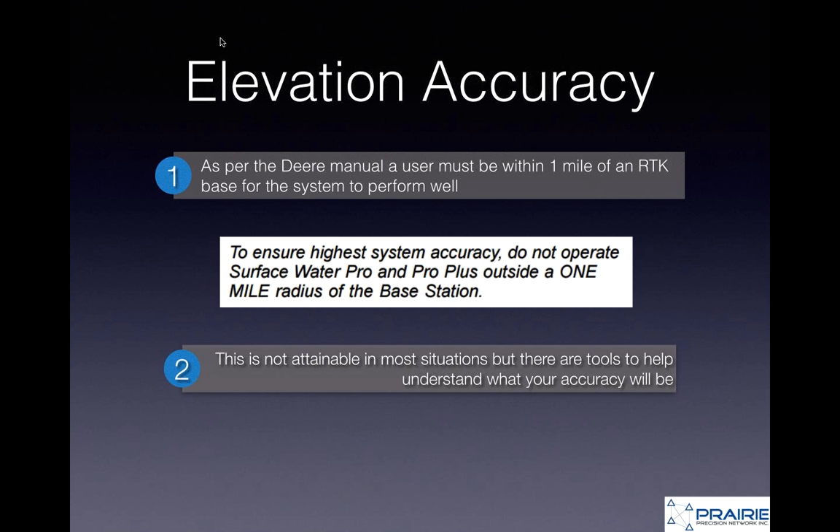I'm not going to load these 2 tools, but these are very good things that you can use. So satpredictor2.deere.com you can use, and it will show you for your area. You can search an area, and it will give you the accuracy level of a given day. It's very important to be using these tools. Traditionally, with SF1 AutoTrac or WAAS AutoTrac or anything like that, we just turn it on and go. It's a little bit different when we're talking higher level accuracy, and especially when we're talking water management. You do need to reference these tools.

And as well, the space weather forecast really affects GPS signal in general. Again, you don't see it as much with SF1. You definitely see it with RTK, what the space weather is doing. So those two tools, make sure you write those down and use them. The one thing that we have found is in your StarFire menu, if you're a John Deere customer, you can see the VDOP.

So if you were to go to StarFire and then letter G on the right-hand side where the little satellites are, you can see your current VDOP number. And that we find should be below 2.0. It just should be below 2 to run John Deere water management applications.

So we did do a couple tests this summer as well. This was on a scraper, and the scraper did not move over these 3-4 days. We took a measurement on August 7th, and you can see the elevation there, and then August 10th as well. So our elevation is 1646.274 on August 7th. Nothing was moved. The tractor was turned on and we just took a snapshot of the screen. We can see that it moves 7/100ths of a foot over 3 days.

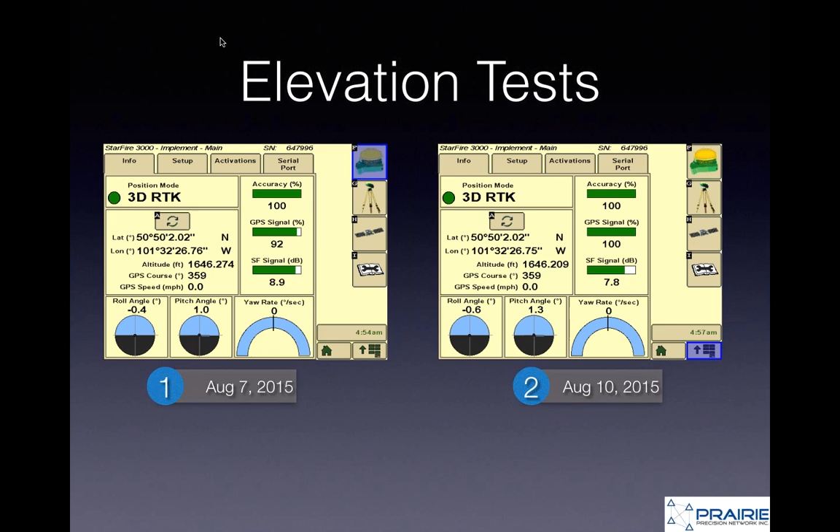So again, as long as you're within coverage, we have quite a few customers using our virtual reference station to do surface drainage and water management of all sorts with our products. So they do work well.

So I guess what we're saying is it's a very proficient way of providing RTK across the most number of acres. Like we talked about with the VRS network, we do not have line of sight issues. Our signal does not degrade. However, we are not recommending our network solution for tiling or land leveling applications at this time. And just on note of that, we are working towards some new products that would assist in these applications and still be able to leverage our network RTK.

So we have customers currently using it for surface drainage, and that's what we're going to focus on today. And that's what we can recommend, again, within coverage and providing you that network solution. So survey optimization: we're going to move into what is a good survey, and Mike Evers is going to talk about that for a few minutes here.

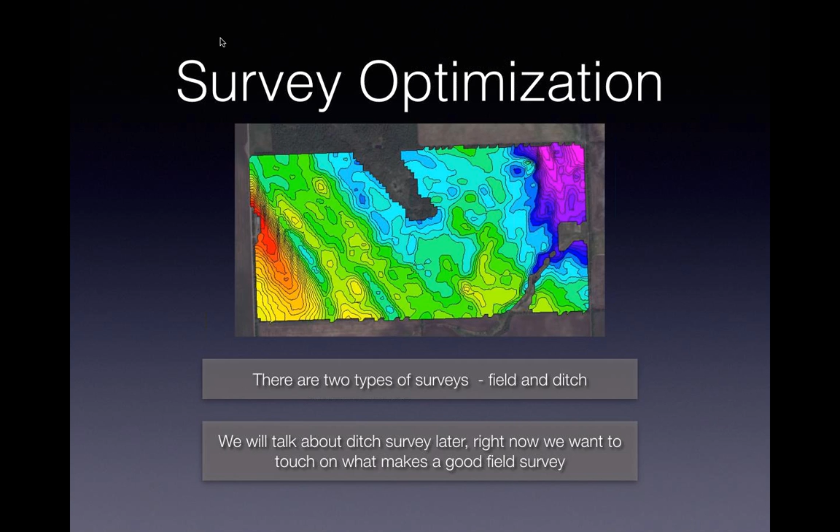What we want to talk about is first, there are 2 types of surveys. We have what we call a field survey, where we're going to cover the entire field, and then we have a ditch survey, where we're just going to survey a portion of the field that we know is a ditch that we want to work in. We're going to focus on the field survey. We'll talk about the ditch survey a little later. So here are some of the things that we want you to keep in mind when you're doing these surveys.

The first thing is the hardware. What hardware are you using to record your data? Obviously we expect you to be using the StarFire receiver with a PPN RTK, but more importantly, how are you recording this data? Are you recording it with the 2600 screen, or there are other options where you can use third-party data collector software. As an example, there's software such as SMS software, and there are a lot of others that you could run on a laptop PC and connect to the NMEA port on the StarFire receiver. The reason you may want to connect to those other types of devices is they record a little bit more information than the John Deere recording.

For example, as Jason mentioned, you want to worry about where your VDOP is. We want to make sure it's below 2.0 when you're doing your vertical surveys. When the John Deere is recording, it's recording all positions, and rightfully so. They want to simplify things as much as possible. But as a surveyor, you want to know if my VDOP is higher than a certain value, so that I'm going to start to question that position.

So the advantage of going to a third-party recording is you might be able to use that to edit out the positions where the VDOP might have gone up too high. Because with those high VDOP positions, your vertical precision is not as accurate, and it may be tainting your survey data. So you want the ability to edit that out to have a cleaner set of data that you're working with.

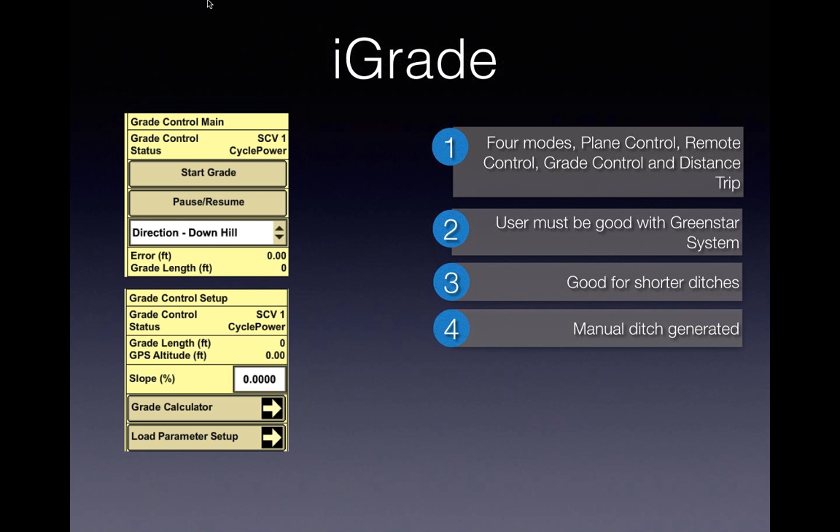What we mean by that is this is going to create a linear ditch, and it will not be able to respond if you have depressions in that ditch that you're creating. So we'll talk more about this in the iGrade optimization portion, but in general, this is a really good product if you've got shorter ditches.

Surface Water Pro Plus. So there's three modes to this: the survey, the ditch, and the levee. Obviously, we're going to focus on the ditch in our area, minus Rosetown that needs levees, I guess. Users do not have to be good with the Greenstar system because it functions very similar to AutoTrac. So if you have a hired hand on your farm that knows how to create an A-B line and knows how to use the AutoTrac system, he will find this very comfortable and very similar with a little bit of training.

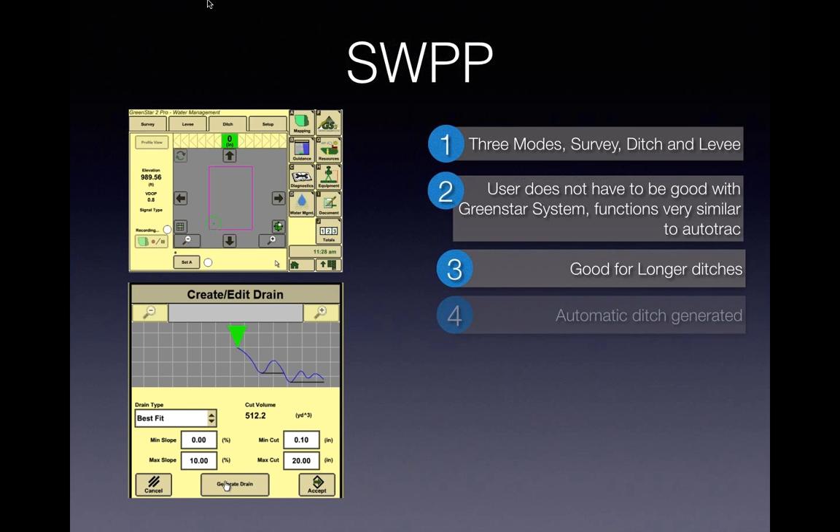We have found in the past that this is good for longer ditches because the computer will recognize those depressions in its survey, and it creates an automatic ditch. So you can see in the bottom image, we have surveyed there with the blue line, and the black line is what we're going to cut. So the computer is automatically creating that ditch and using those natural drops in that survey where iGrade would not do that.

So in general, the easiest way to compare these two products and to explain these two products is iGrade is good for shorter ditches. Surface Water Pro Plus is better for longer ditches. Not to say either one can't do it. It's a very broad generalization and kind of simplifies it, maybe too much, but that's what we found worked explaining it in the past.

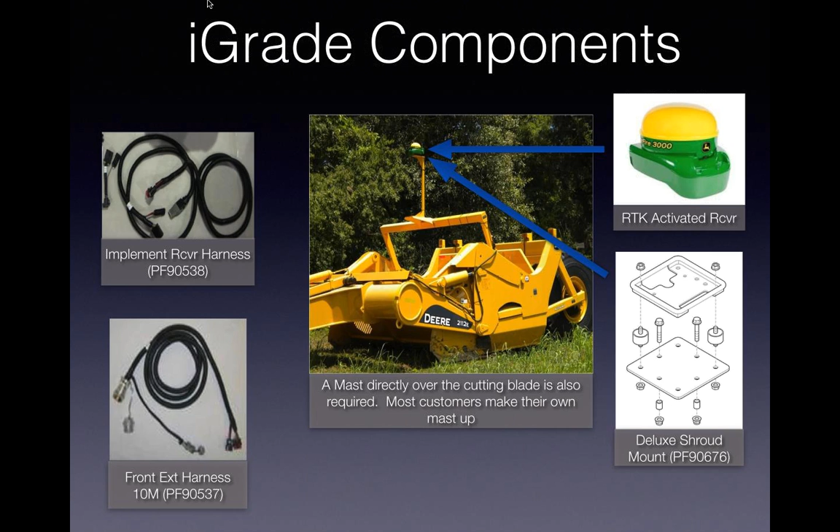As far as the iGrade components, we wanted to just compare the iGrade components to Surface Water Pro Plus because this is sometimes a little confusing. So we do have a lot of dealers on the line here. So I have added the John Deere part numbers for you to reference afterwards. So what we do need is a GS2 or a GS3 screen. We have a couple harnesses there that we need on the tractor.

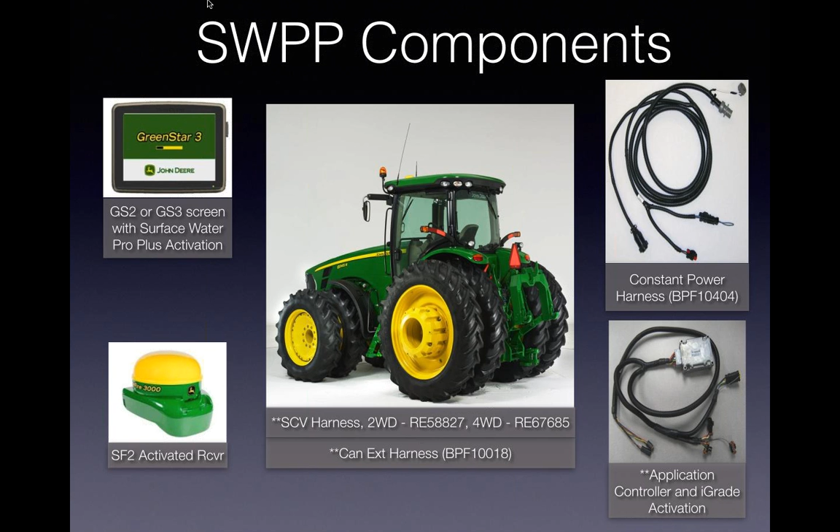An SCV harness for two-wheel drive or four-wheel drive, a CAN extension harness. You need your constant power harness going to the back of your tractor, and then your application controller with an iGrade activation. That takes care of all the tractor components. On the scraper, from that constant power harness at the back of the tractor, we have in the bottom left our front extension harness, and that's the 10-meter version. That runs all the way up and back into our scraper.

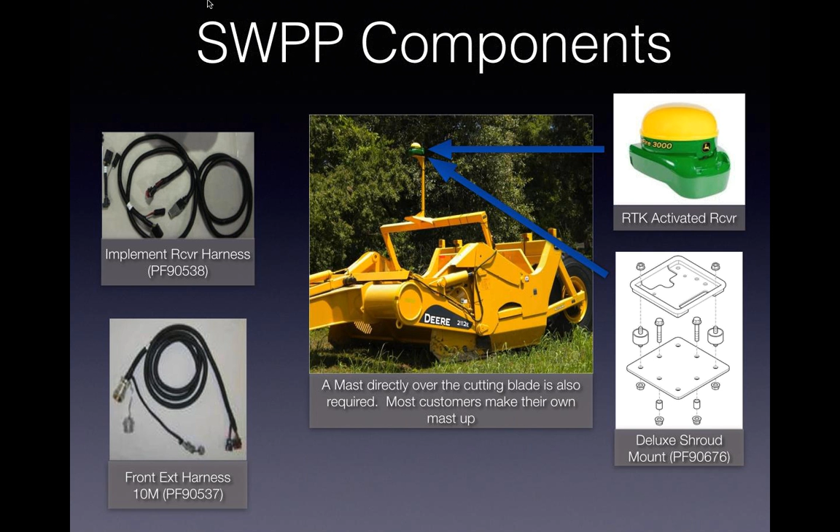Then we have our implement receiver harness in the top left. As well, we have our RTK activated receiver, and it has to be RTK to work with iGrade. And we also have a mast that is directly above the cutting blade. There are some available from John Deere, but every scraper is a little different, so generally speaking, customers make up their own. And then you need a deluxe shroud mount. So you can get all those parts individually, or you can order that one part number and it gives you that entire kit. That's a little bit cheaper to put a deluxe shroud mount on your mast.

Moving to Surface Water Pro Plus components, if you remember the components of iGrade, it's all the same except we're adding two things. We're only adding two things. We're adding the Surface Water Pro Plus activation, and we're adding the SF2 activated receiver.

Hey, Angelo has a good question. Which tractor series are working on iGrade? Anything with electronic SCVs, so 9000 series and newer that have the newer SCVs will work with iGrade. So 9000 and newer all the way up to the 9Rs. Good question.

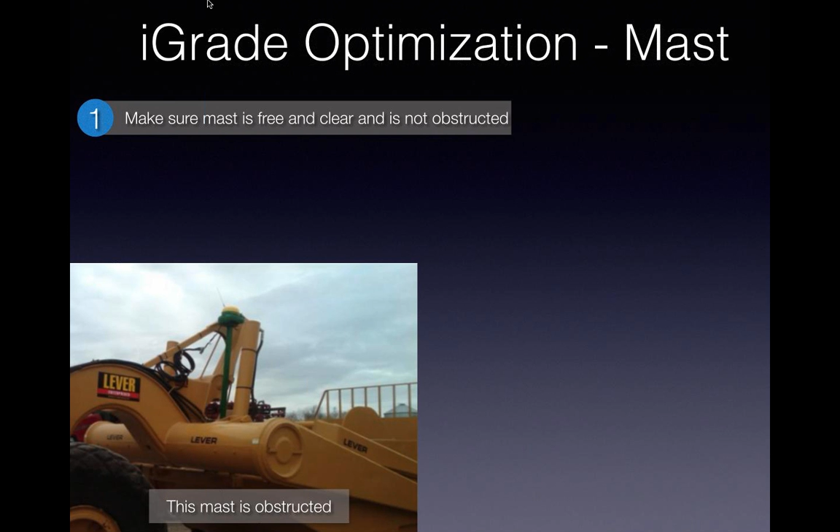The first one, this seems like a simple thing, but it happens: you need to make sure your mast is free and clear and not obstructed. So in this example here this mast is obstructed and causes lots of grief, and this would be the same for any RTK system. That metal there would be interfering with the GPS signal as well as the radio connection or the modem connection that we use with network RTK. So make sure that your mast is free and clear.

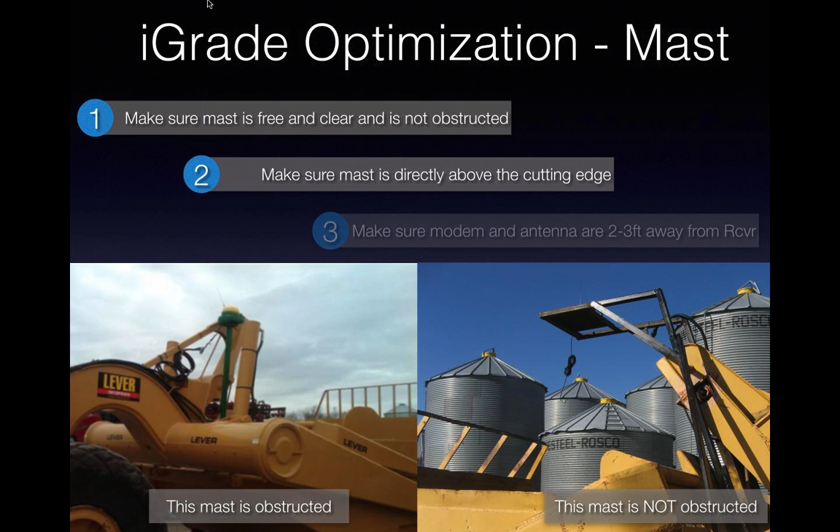And make sure your antenna and your modem are 2 to 3 feet away from the receiver. That just is for signal interference issues that we have seen in the past. And so the best practice is, make a mount like you see here on the right-hand side. Mount your receiver in the middle, let's say, but then put your modem on one side of that iron there, and your antenna on the other.

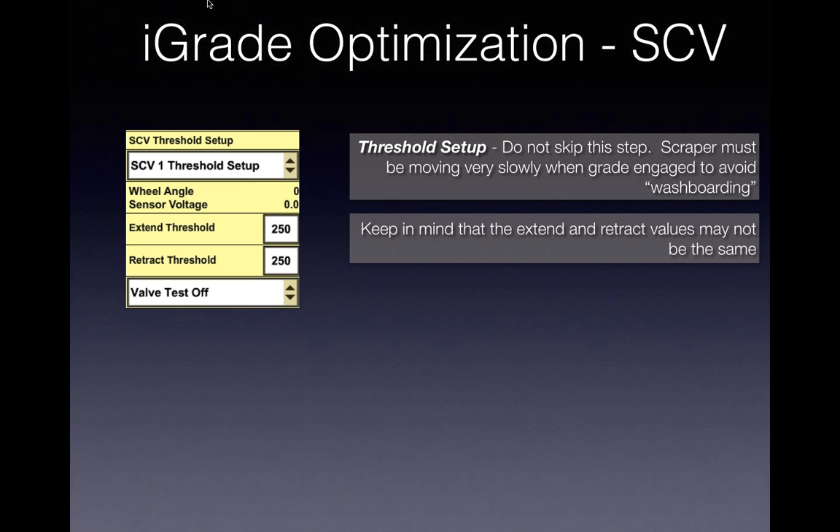So one of the things that are very important with iGrade setup is the threshold setup. So this is in the screen and in setup, and the scraper must be moving very slowly. So when we engage this, we want our scraper moving very slowly when going up and down. So what we do here is we guess a number and we hit that valve test box, and then we move it to extend or retract. We detent the SCV that we are using, and it will kick iGrade in. And you'll be able to see how fast or how slow that is operating.

You want your retract threshold slow, which is going down, your extend a little bit quicker coming up, and that is to prevent washboarding. So 2 things to consider if you're a dealer on the webinar here is DTAC case 91500, the installation of a counterbalance valve, and the iGrade calibration as well is a really good case, 102673. So have a look at those 2 if you're a dealer, to be able to just learn a little bit more about that.

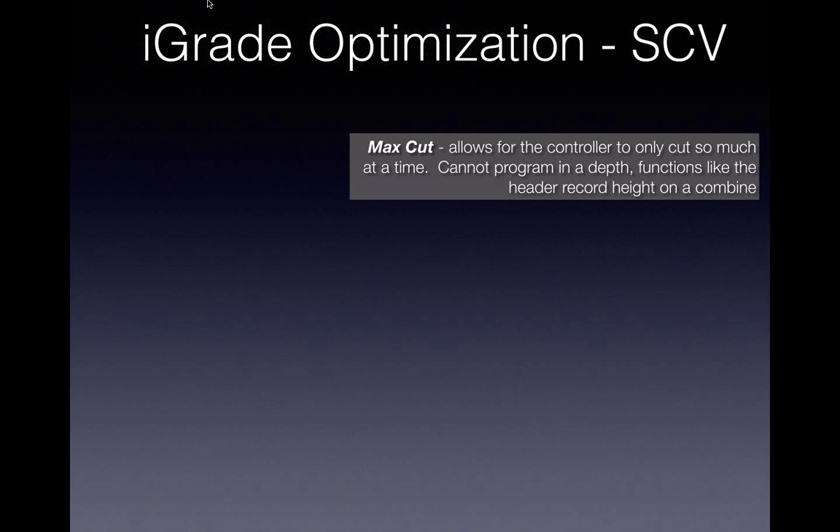And a couple features we wanted to talk about in iGrade as far as the setup is max cut. It is there to allow the controller to cut only so much at a time. You cannot program in a depth. It functions very similar to your record height on a combine. So if you have a John Deere combine and you know about the record height and when your recording starts, that's very similar. So for this to work, you need 2 RTK receivers.

Ourselves, we did a bit of testing with this, and we just found the feature for having that extra RTK receiver wasn't as good a feature as we had hoped for. So generally speaking, we don't use it, but it is available if you do want to put another RTK receiver on your tractor.

Load limiting. This allows for a stepped response from the controller. So you can tell it at a certain RPM, start lifting, and it will start lifting the scraper. So as you bog down in a certain cut, it will start to lift the scraper. You cannot use it with Surface Water Pro Plus. And the recommendation as far as leaving it off is it's a computer, and we can't program a range into it for today. So we can only give it 1 RPM.

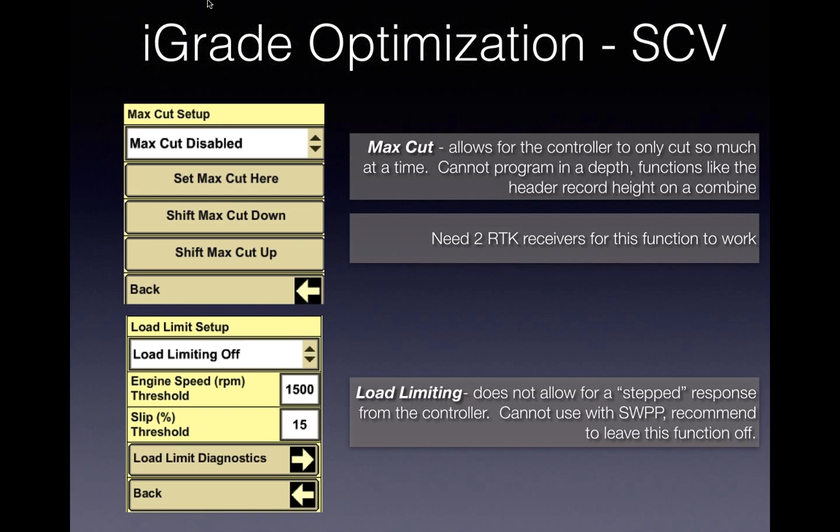So if you're cutting at, say, 1750 RPM, 1800 RPM, and you tell it, well, at 1650 RPM, I want it to lift, we cannot tell it at 1700 RPM, lift this percentage, at 1650, lift this, at 1500, lift this. It is 1 or nothing. And so what we have found in our testing is it being a little bit too slow to respond. As the scraper starts to bog down, it's too slow to respond.

So maybe we're wrong on that, but definitely it's a feature you can fool with and try. Just be aware that it is a black and white thing, it's a computer. So we recommend to leave it off. And as well with Surface Water Pro Plus, you have to have it off.

Now, just going into the modes, so that was the setup of iGrade, and into the modes, the one mode that is very useful is plane control, and it allows the operator to create a flat surface with 1 or 2 slopes. So this is very simple to use. It's very good for creating a bin site or leveling an area for a shop, and that's the one image there from the screens, and this is the other one.

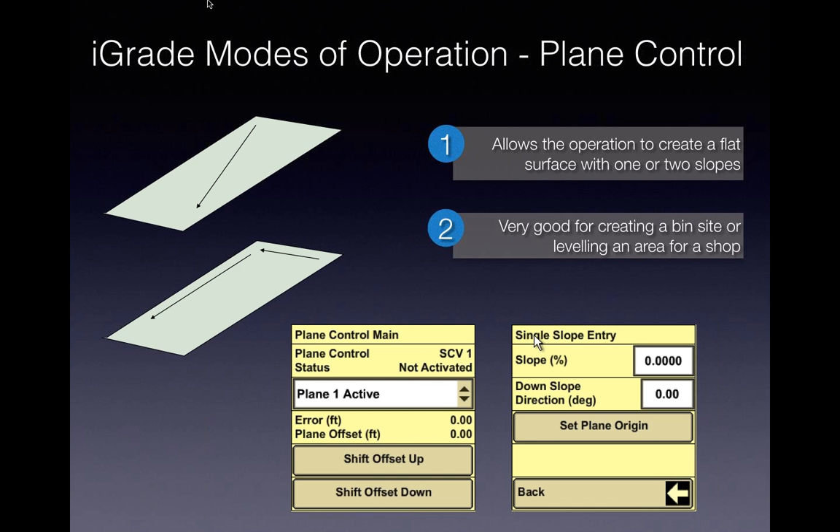So you just basically on the right-hand side, lower your blade down to where you want the plane to be. You hit set plane origin, detent your SCV. In this case, it's SCV number 1, and you drive. It's very simple, and there's not much more to say to that. You can program a slope, and you can program dual planes as well, which we're not going to get into today, but just letting you know that it's there.

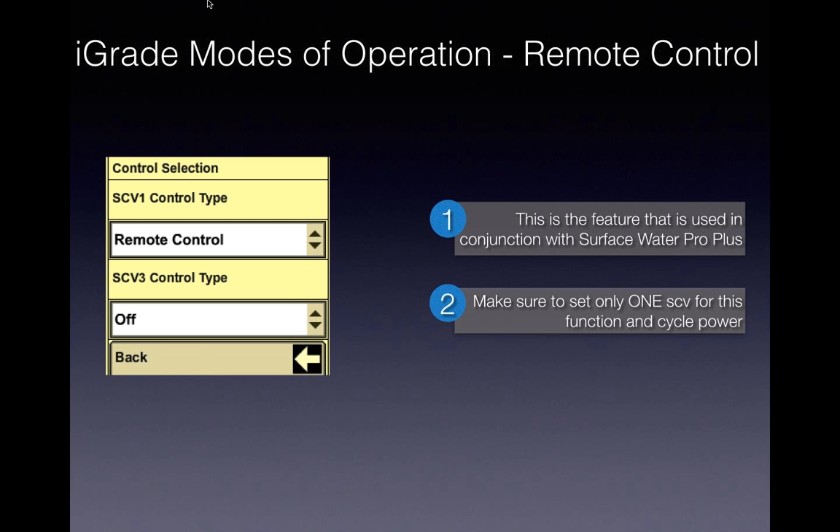Remote control. So this is the feature that's used in conjunction with Surface Water Pro Plus. So if you wanted, again, that full meal deal package of the controller controlling the hydraulics and then Surface Water Pro Plus, you're going to set your control selection to remote control. So again, this is in application controller and then setup, and you're going to go to remote control and then be done. So that's pretty simple. So again, you can only set 1 SCV for this, and then you cycle power once you make any changes, and you're good to go.

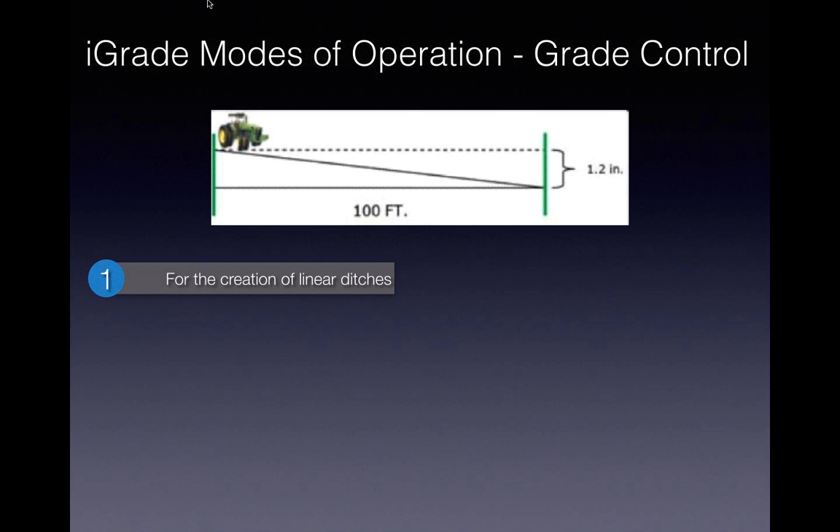The function that most people use with iGrade is grade control. So this creates linear ditches. So a straightforward line, like you can see there in the image, we just go ahead and lower our blade to where we want to be and start. So you input the grade, and then it continually calculates from where it is set from. I really used bad English there.

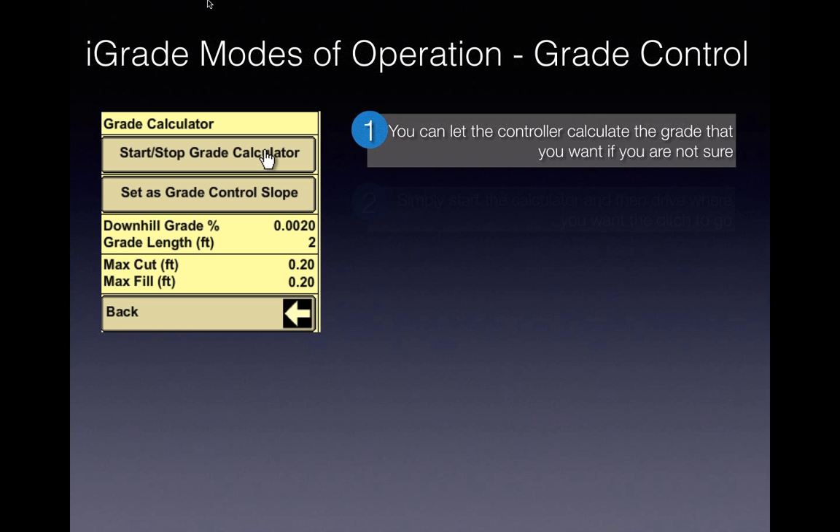One of the things you can do, though, is you can use the grade calculator. There is a grade calculator in grade control. It's very simple to use. You go to your application controller, you hit start grade calculator, and it will record wherever you go the grade length and the grade percentage. It's really simple to use. Once we have that, we would take that calculated value, so this downhill grade here, 0.002%, and we would put that into the grade control slope box.

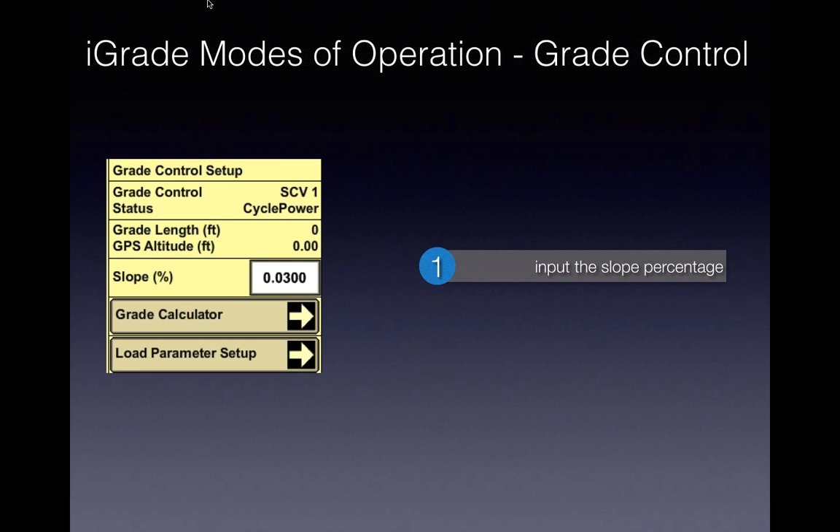So this is our run page. Sorry, not our run page, but one of our setup pages for our grade control. So all we do here is we have to tell it what percent slope we want. Generally speaking, 0.03 works well for a slope to get the water moving. And that's all you do. Input that slope percentage there.

And then on our main run page, it doesn't tell us our slope percentage. We can set their pages up differently. And then the user, you have to tell it which direction you're going. So if you remember back to when we were talking the difference between iGrade and Surface Water Pro Plus, and I said you have to push a lot of buttons, I hope you're starting to see that there are a lot of buttons to push here.

So you have to tell it the grade, you have to tell it the direction, and then you lower your blade wherever you want to start, okay? Because this is different than what Surface Water Pro Plus is going to be. You set your blade to where you want to start, and you hit start grade. And it will create that point, in this case, in this example, that 0.03 grade from wherever we drive.

Making sure you're pointing in the right direction. Yeah, and you're pointing in the right direction. You're ready to go. You're at the start of your ditch. You hit start grade, you detent SCV1, and it will start cutting that 0.03% grade. Okay?

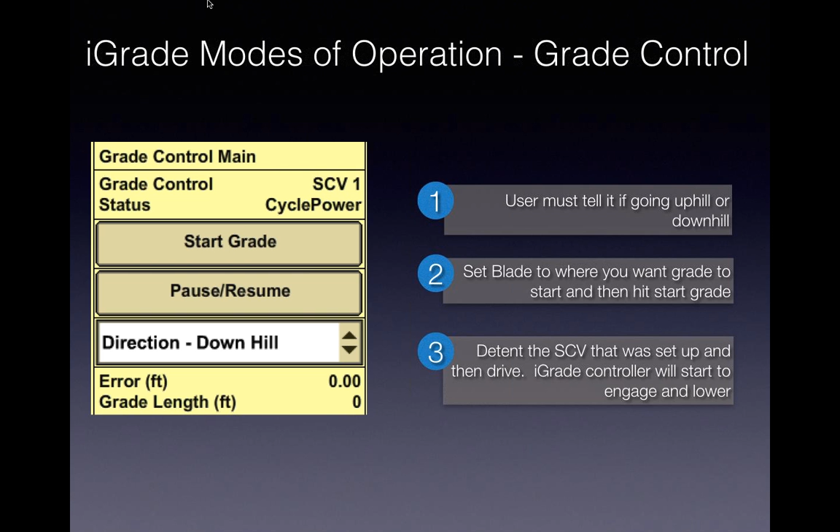So we can pause here for some questions, but again, just reference that iGrade handout if you can. And that is just kind of a quick reference guide because there's a lot of things that we just talked about. Just click on that guide there, Mike, just so we can see it ourselves. And it gives you a little bit of an indicator of how to go about, scroll down, setting it up and going about it. So I think we kind of went through that pretty quick, but that guide will help you as well. If you could zoom out a bit, I just want to see if I had the screenshots there.

Yeah, one of the questions we have here is why would a person not just buy Surface Water Pro Plus instead, like skip over iGrade? Good question. What we saw in the past is that if you buy iGrade, there's no cost or disadvantage or advantage to be upgrading to the Surface Water Pro Plus later. So currently with John Deere's pricing, there's no discount to buy Surface Water Pro Plus to start with. So what we had happen is a lot of customers buy iGrade, and then of course you have to buy the Surface Water Pro Plus activation and add an SF2 receiver. So for some guys that just had the one RTK receiver, iGrade worked, and that's all they needed.

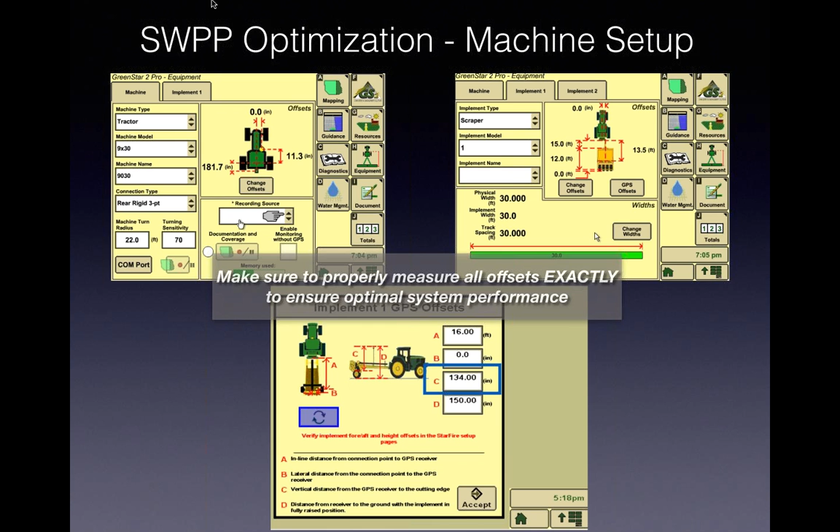So in this example, we have 16 inches of travel. The system needs to know that to operate properly. If you skip this step, or if you do this kind of quick, you're going to have problems. At the end of the Surface Water Pro optimization, we are going to talk about how to calibrate this. Because that first mast, if you remember, it moved up and back, and it travels on an arc. So we do need to calibrate this measurement. So make sure to measure all offsets exactly to ensure optimal system performance.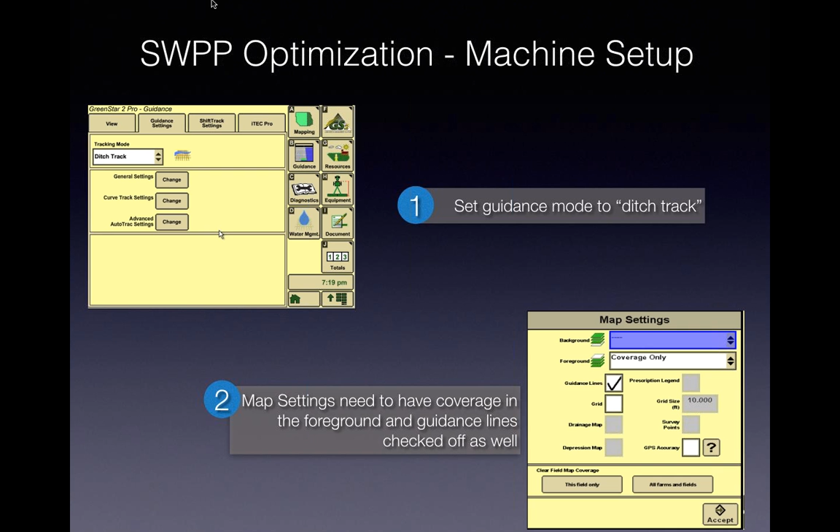So what we're going to do is, first thing, we need to go to our tracking mode, and we need to change our tracking mode to ditch track. If you skip this, you won't be able to make a ditch in water management. So we are in Green Star, letter B for guidance, and we've changed our mode to ditch track. Map settings need to have coverage in the foreground and guidance lines checked off as well. So that's under letter A. Go to your letter A, go to map settings, and then check off guidance lines and coverage. It should be defaulted, but just double check that.

And then we have to set up our documentation. We do need documentation on for this to work. So in your boxes there under letter I in the Green Star menu, we're going to hit water management, and then the type we're going to choose is ditch.

So in Surface Water Pro Plus setup, change the survey mode to distance based. It defaults to time. What we have found and what we recommend is distance based works best, and we want to change that to 7 feet. As well, your survey receiver source will default to the machine. So again, if you remember from our requirements, we now have a bubble on our tractor so we can auto track the ditch, and that needs to be changed to implement 1.

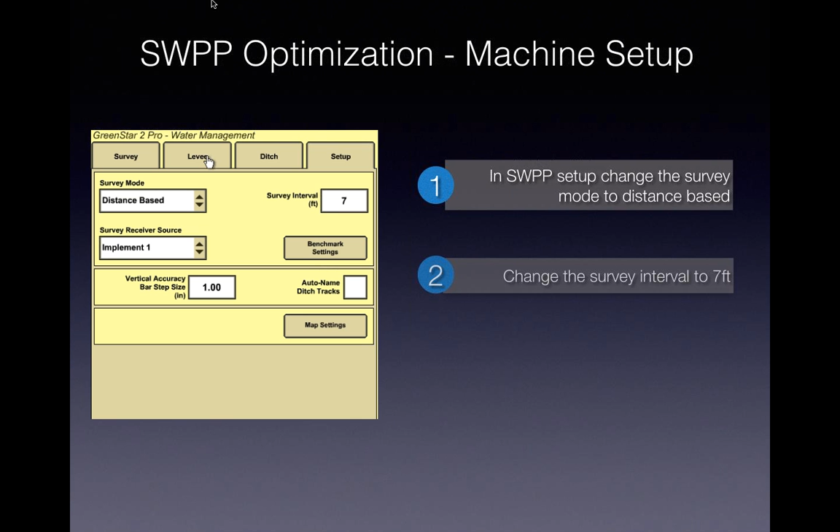Okay. Now, you can do a survey within Surface Water Pro Plus as you're driving. So again, back to what Mike was talking about, the survey. We do have customers doing this on machines, and it is working. And you can do this as you go through the field. Just keep in mind those things that Mike talked about that affect the accuracy of that survey as you go about doing that. So again, make sure that the survey receiver source is set to the scraper receiver.

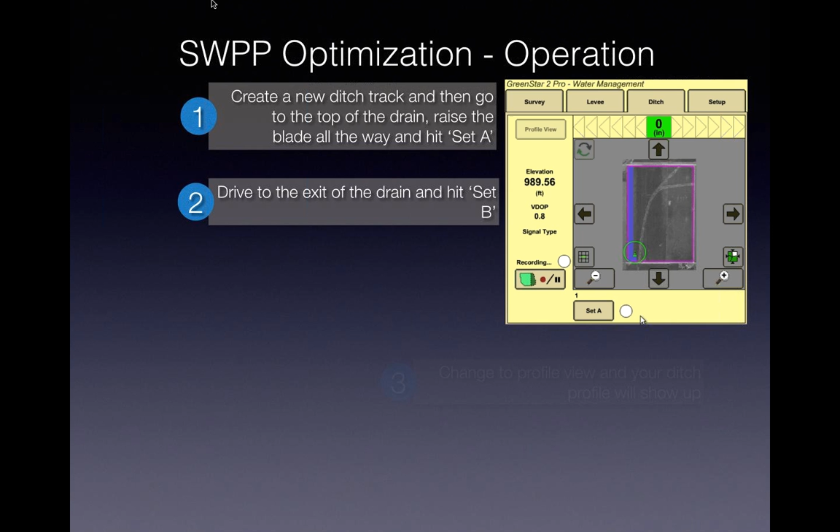So as far as operating this, once we're ready to go, we hit the ditch tab at the top of our water management page, and we raise our blade all the way. So if you remember in iGrade, we were lowering it to where we wanted to start and then hit set start grade. This is different. We're going to raise our blade all the way and hit set A. We're going to drive to the exit of the drain and hit set B. So remember how I said that this function is very similar to AutoTrack. If you've used any John Deere AutoTrack products, you are very familiar with what we're talking about here.

Once we do that, we change to the profile view, and then our ditch profile will show up. So if you see in the top left corner, there's a little box that says profile view. We change to that, and then we get this image. Once we have this image, we can create our drain. So what we're looking at here is a grid and an example of a survey. The blue line is what we have surveyed, and the bottom of the green triangle is where our current blade is right now, what the computer is seeing as far as where the blade is.

So what I want to do now is hit create edit drain. So just to recap, I've hit set A, I've hit set B, I've hit profile view. Okay, now that create edit drain box shows up, and I can choose that.

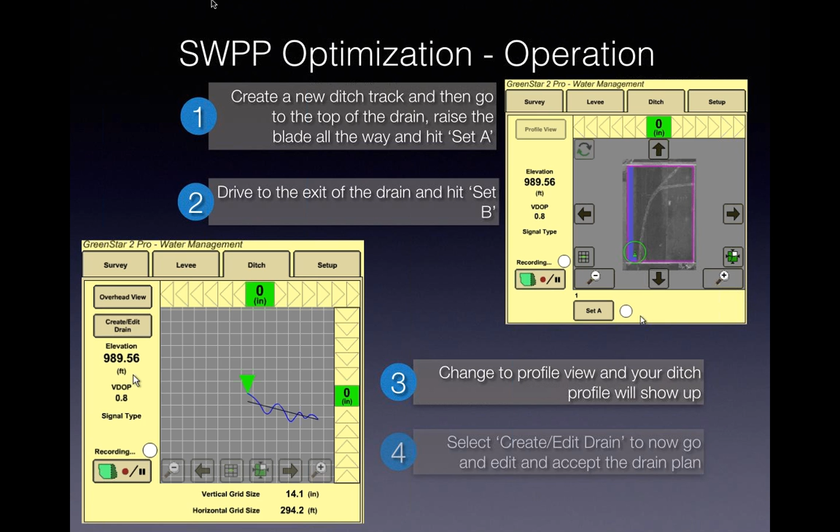So 2 types of drains are available, and we need to talk about them. So in iGrade, again, as I keep bouncing back and forth, we only had the option for a linear drain. This Surface Water Pro Plus allows us a best fit drain versus a linear drain. What a best fit drain does, in these 2 examples you can see, is it uses those natural drops in elevation, so it doesn't need to cut a whole bunch of stuff where it's going to drop naturally. So it's going to remove possibly less dirt, but get the job done quicker.

Whereas a linear drain just goes straight across, so you're going to have cuts and fills. So if you remember what I said, very broad strokes and generalizations, iGrade is good for shorter drains. This example on the right, if this was a longer drain, we would have depressions in there, and iGrade would not be able to recognize those. So yes, you can go along, see that there's a depression, lower your blade again and hit start.

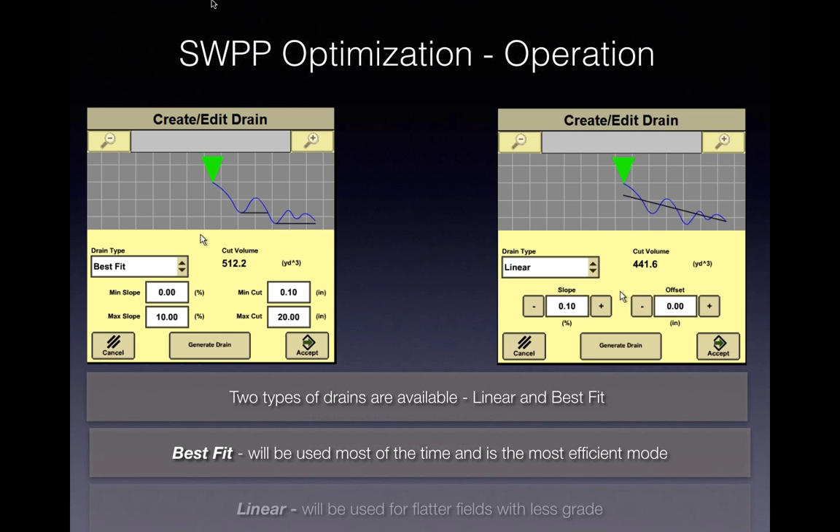But what the best fit drain does on the left-hand side, and the real power behind the computer doing this, is it will figure that out for you and make that drain correct the first time. So best fit will be used most of the time and is the most efficient mode. But the reason linear is still in Surface Water Pro Plus, you may be asking, well, I'll never use linear. Best fit drain does not work well with flatter fields, with a low grade field, low grade drain. You want to make sure you use linear there.

And it's very simple to know which one to use. You just switch between best fit or linear and hit generate drain. You haven't accepted anything yet, just change your drain type between linear and best fit, hit generate drain, hit accept, and you're good to go. So once we hit generate drain and accept, it will function much like auto steer. Okay, so in the bottom left corner, you see your very familiar wheel and the pie. So you turn your steer on.

Now, another advantage of Surface Water Pro Plus, if you remember with iGrade, we had to tell it what direction we were going. With Surface Water Pro Plus, we just can drive. So it will cut uphill. So we're at the bottom again. I don't know if I said this, but in Surface Water Pro Plus, we have to always survey from the high to the low. So your blade is all the way up in the air. You start at your high point, you drive to your low point. Okay, you have to always do that with Surface Water Pro Plus.

As soon as you turn around, turn auto steer on, okay, and it grabs the line, then you can detent SCV 1 or 3, whichever one you're using, and it will start automatically cutting. If the system is going to cut too much, you can override it at any time and run it manually.

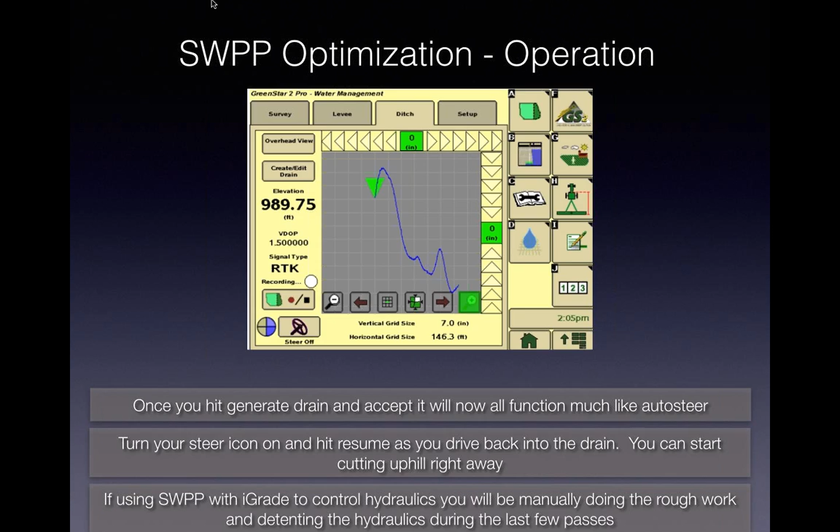And generally speaking, what you're going to do is manually do all the rough work and then allow this system to cut in for all the last few passes to really just get that perfect job done that a human sometimes doesn't get done perfectly. And that's where the system really shines. It does it right the first time and you're done.

Once you get used to this screen and the grid and everything, it really starts to make sense. And there's an elevation calculator there. It tells you exactly what your elevation is. And as well, like we talked about, your VDOP is always on this page as well because it's that important that Deere put that in there.

So in this example of us running a ditch, the bottom of the triangle is our blade, like I said. The blue line is the survey, and the black line is our desired cut depth. You will see kind of hidden in there a little pink line, and that is what we have cut, okay? And that will always tell you what your last pass, what you cut.

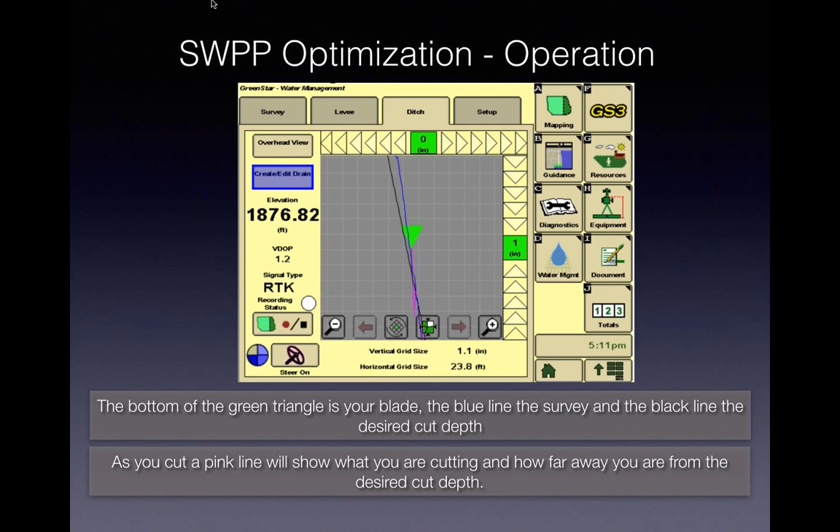And it is kind of confusing the first time you look at this, but we've had a lot of people use this, and it starts to make sense once you understand the grid. So the grid, for example, in the bottom there is 1.1 inches for every vertical. So going up and down on that grid is 1 inch, okay? Every box in that grid was 1 inch.

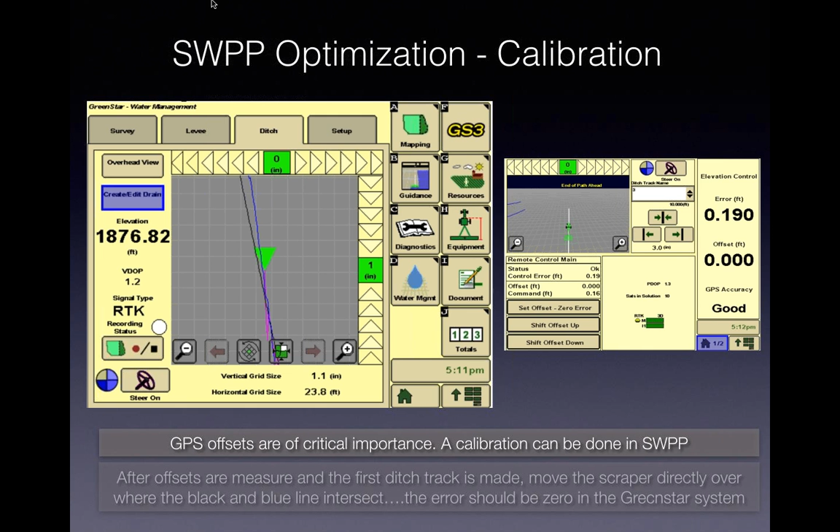So we talked about the calibration of Surface Water Pro Plus. We want to make sure that we share with you that the GPS offsets, like we said, are of critical importance, and a calibration can be done in Surface Water Pro Plus. So after your offsets are measured and after the first ditch is made, what you're going to do is move the scraper directly over where the black line and the blue line intersect. And that elevation error should be 0.

Okay? So if you can see this example on the right-hand side, how we have our pages set up here, if we can pretend that the bottom of that green triangle is right over top where the black and the blue line intersect, that error should be 0, and in this case, it's not. So what we can do is we can go into our GPS offsets letter C, and we can change it until we get that error to be 0.

So go back to your machine setup, go to implement, go to GPS offsets, and quite frankly, this is just a bit of guesswork. Just take that error number. In that case, it was 0.19 inches. Sorry, 0.19 of a foot. And you would just measure, and you would just change this accordingly to make that 0. That is the way we calculate for an arc in Surface Water Pro Plus. Okay.

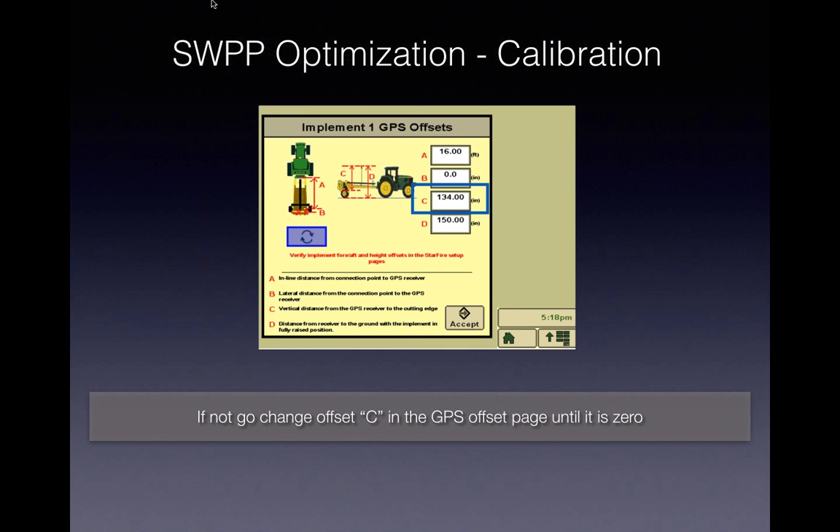Again, your mast, or that mast, or if you make a mast that goes back, is going to travel on an arc, and you can't really measure that, but you can calibrate it. So that is a very important thing. Essentially, if your system is cutting too much and you don't think it's calibrated correctly, look at this, I guess, is the biggest thing to say.

So again, like I was saying with the mast, if you can think about this thing moving up and down, this does not move straight up and down. It moves on an arc trajectory, and every single one that we have set up in the past, we have had to do this with these type of masts.

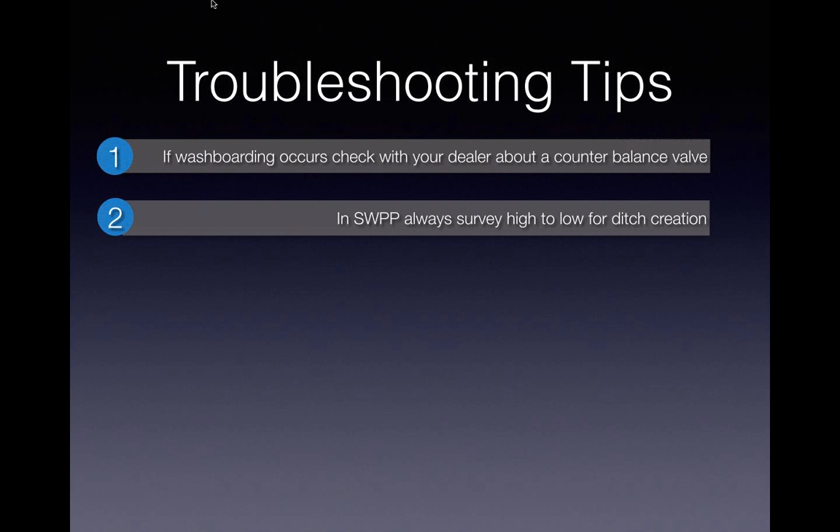In Surface Water Pro Plus, always survey high to low for ditch creation like we talked about. And in Surface Water Pro Plus, if you can't create a best fit drain, if there will be an image that comes up that says cannot generate drain, blah, blah, blah, try changing to a linear drain. Or try changing your parameters a little bit higher for the settings on that ditch.

If auto is grayed out or crossed out in SCV control, try turning the tractor off, unplug the application controller, clear the codes, turn the tractor off, plug the controller back in, and start the tractor and try again. That's a lot of steps. Essentially, if you cannot turn auto on in your hydraulics, which we did not cover in this section, but it is in the quick reference guides that we have for you, just talk to your dealer, because that's something that needs to get changed.

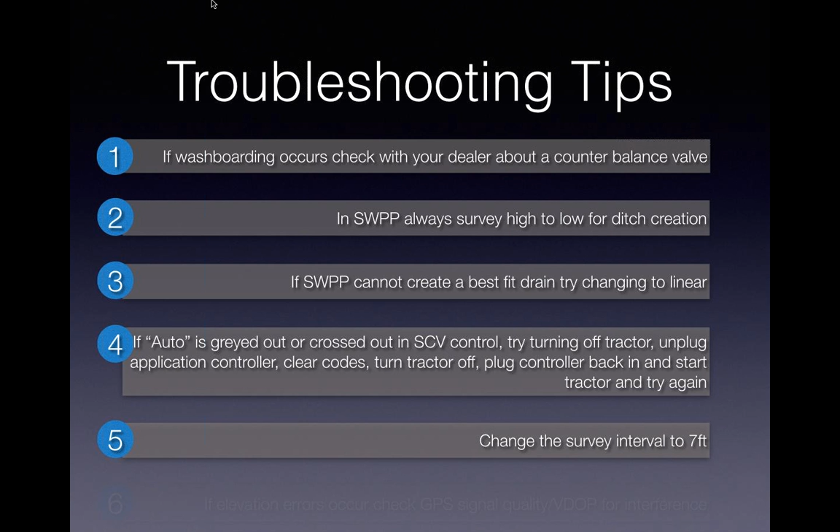Make sure you change that survey interval to 7 feet. And if elevation errors occur, check your GPS signal quality and VDOP and see if there's anything that can be done. So moving that antenna away from the bubble changes things, and changing the GPS signal quality as well.

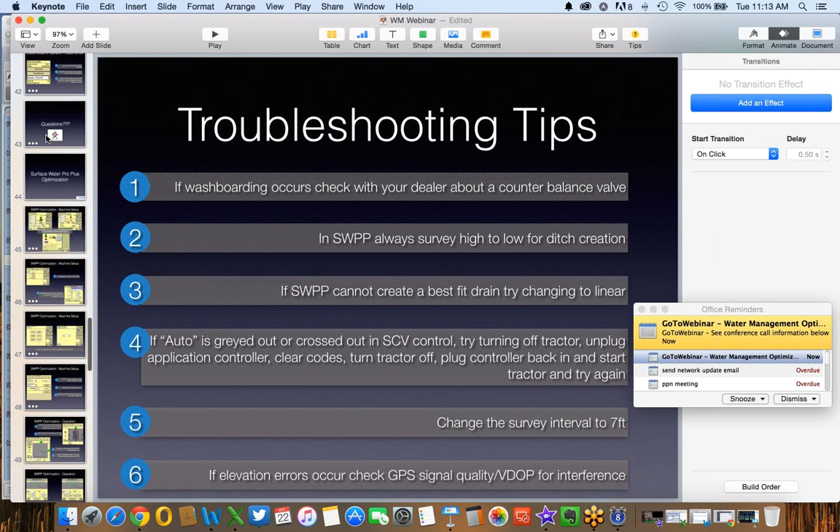So if you are creating a longer ditch and need to work over a couple of days, you could come back to this point, record a control point, come back there and hit calibrate, and it will calibrate to that previous control point to get rid of any elevation errors. Similar to a shift track. It's similar to a shift track, but vertical.

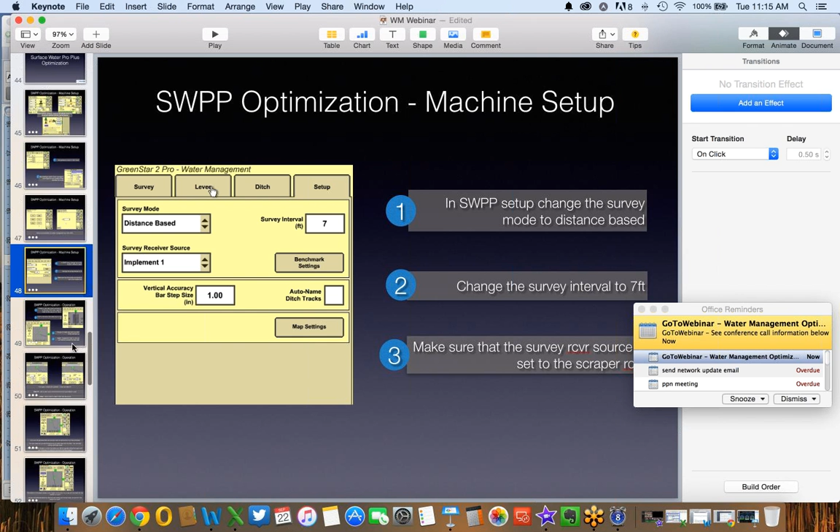In general, what we have recommended to previous customers is get that ditch done that day and then move on. And if you are coming back to a ditch and it's not that long, just resurveying it is essentially the best way to make sure that you do not have elevation errors. Just resurvey it and you should be good to go.

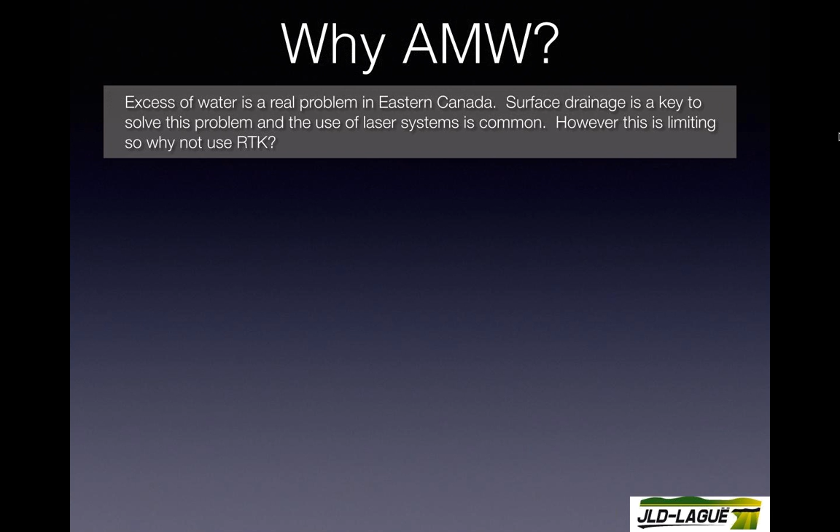So from there, why did we choose AMW? In our area, the excess of water is a real problem, so surface drainage is the key to solve these problems. We made some studies and we found that it will affect 30% of the yield in our fields. In 2006, John Deere did not have any solution, and the land leveling that was done in our area was done by contractors.

And it was a laser mode that our customer was using. So at that time, we looked for a solution for land leveling. When we looked for that solution, our criteria was to be compatible with the John Deere StarFire receiver. We were looking for topography mapping, planning of the surface drainage, and not only laser simulation.

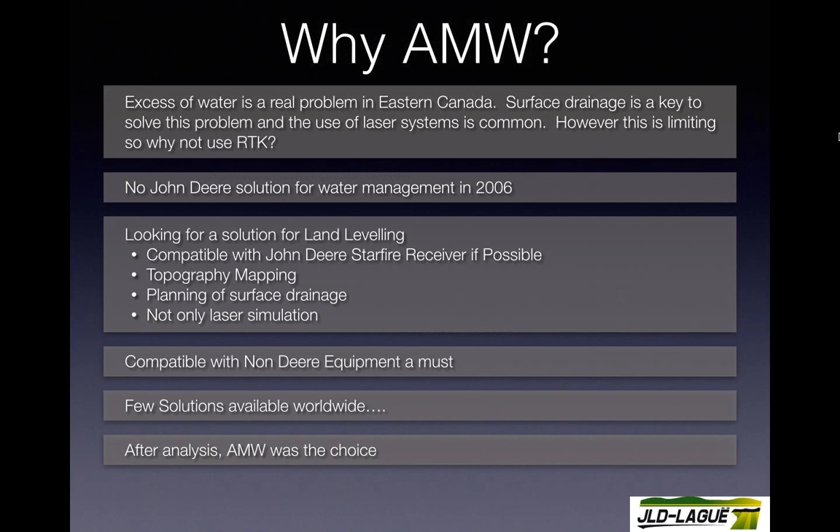So at that time, there were a few solutions available worldwide. Almost every company was interested to make their product available from us. So after the analysis, we found that AMW was the choice. So who is AMW? They are a software developer specialized in elevation and machine control for agriculture, construction, and waste management. Their solution for agriculture is topography mapping, land leveling, tiling, and drainage design, and also ditching.

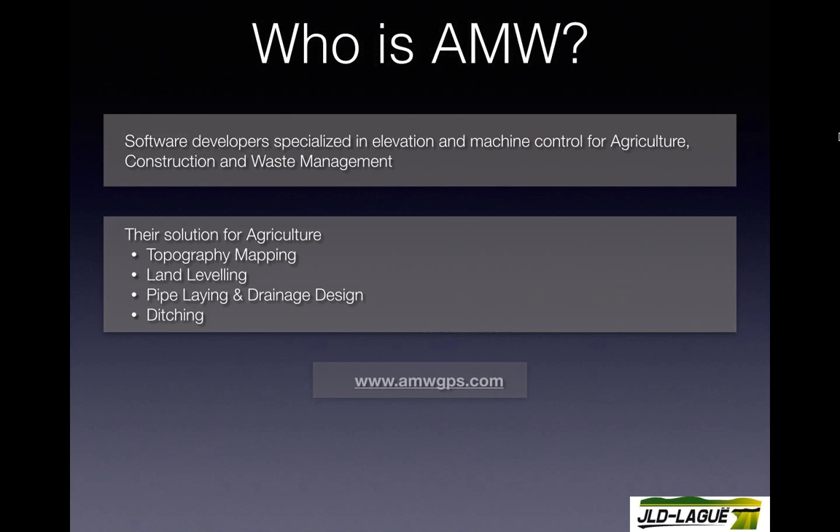So our experience with these guys, we have been working with them for 10 years now, and we are close to 300 units working in land leveling, and I would say about 40 to 50 units for tiling. So we are gaining experience, and I can say that we are experienced with this system. We found also that the distance from the base stations is crucial. So for land leveling, we won't go over 3 kilometers, and for tiling, we won't go over 1.5 kilometers.

And we found that shading and multipathing have more effect on the elevation side than the guidance side. So when we are installing a base station, we want to make sure that we will not have any of these things. We also found that the StarFire receivers are good, but they are limiting in configuration. We are not able to change the elevation mask, so that results in some elevation shift a few times per day. So we know that other companies do have this problem, but it seems to be less prevalent.

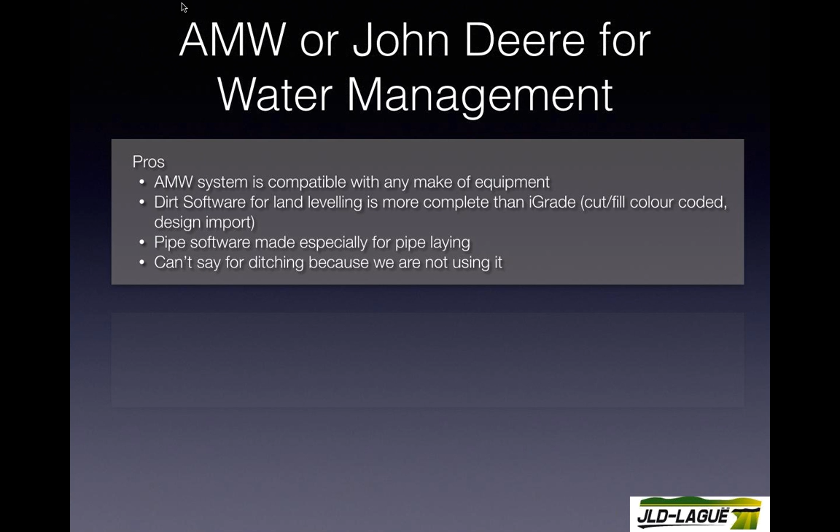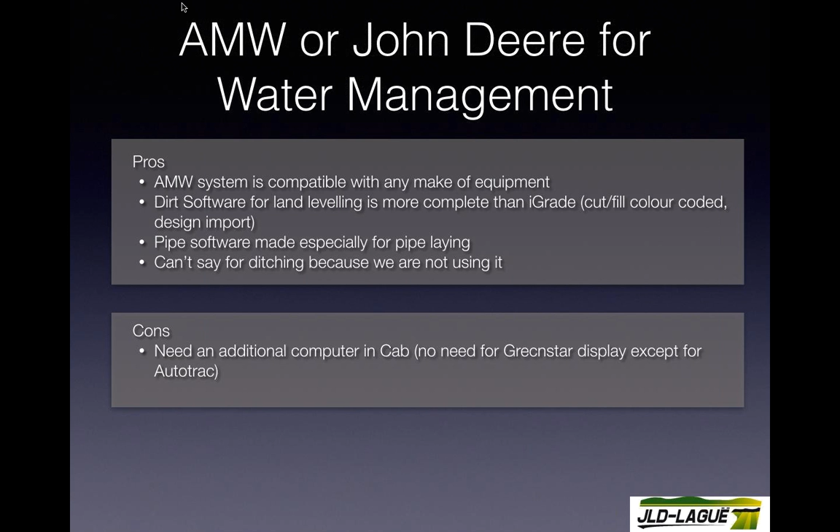Also, we can change the cut and fill color so we know where we are in the job that we are doing. The Pipe software has been made especially for tiling, so it's working with minimum slope. I can't talk about ditching because in our area we are not using it. And the cons for AMW: we need to put another computer in the cab, so we cannot use the GreenStar display to do our land leveling job. So it's not a green on green solution. I know that it was quick, but do you have any questions about that?

One of the questions we have here, Josh, we have two actually, but one of them: can we use that with an iPad, or does it have to be a laptop type computer? It's a laptop type computer. For now, we are buying some commercial type computers that we are putting in the cab, but it's not compatible at this time with an iPad since we need to have COM port communication. It's not Bluetooth communication.

And the other question I had is, the majority of your customers, the 300 or so that you have doing this, are they going out and surveying the field, and how are they doing those surveys, or are you guys providing that service to them, or do they just go and start making ditches in the fields? No, no. Most of our customers, I would say 99% of them, will do their own survey. So they are putting the system on a Gator or an ATV.

Yep. And from there, they are sending the survey to our agronomists, or there's a few places that offer the service to make the design, but they are sending the survey to their agronomists, and from there the agronomist is doing the design, and then once the design is okay, he's sending it back to the guys, and then he's starting leveling.